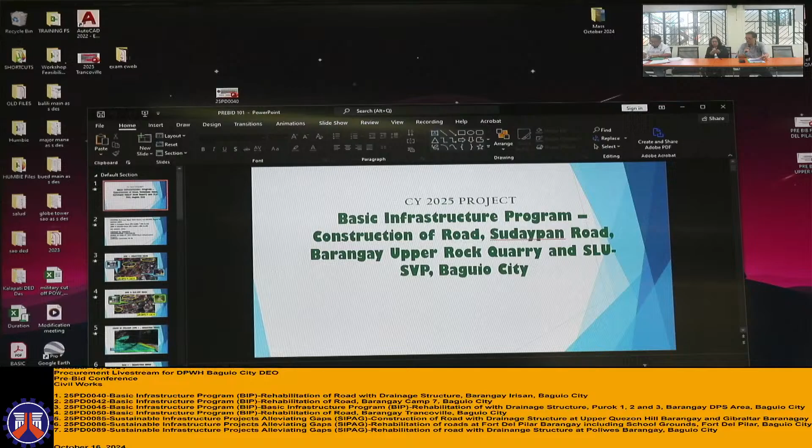And for the first project to present, this is contract ID number 25PD0038. This will be discussed by Engineer Blessing. So you may now start.

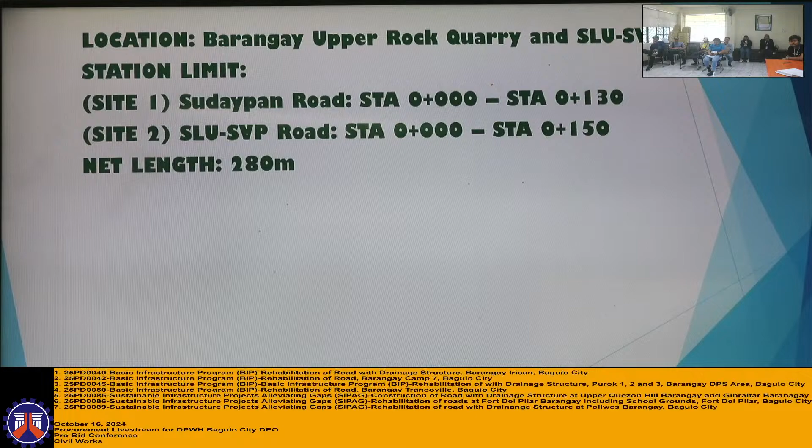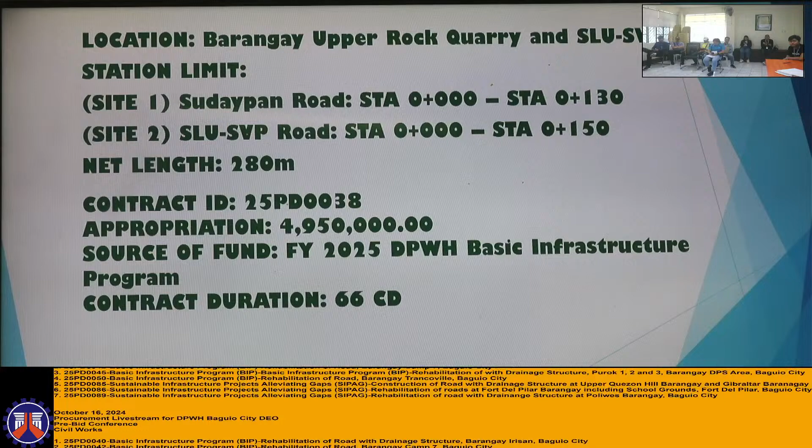The station limit for Site 1 at Sudaypan Road is Station 000 to Station 130, and at Site 2 at SLU-SVP Road, Station 0 to Station 150. The net length of this project is 280 meters with a contract ID of 25PD0038, with an appropriation amount of 4,950,000. The source of fund is FY 2025 DPWH Basic Infrastructure Program, and the contract duration is 66 calendar days.

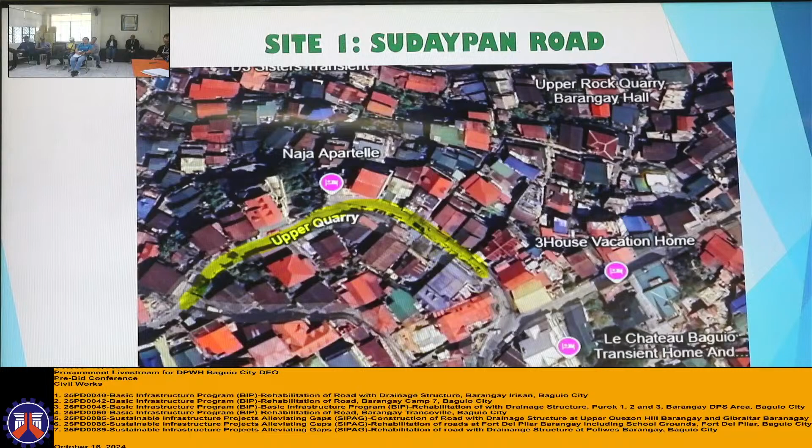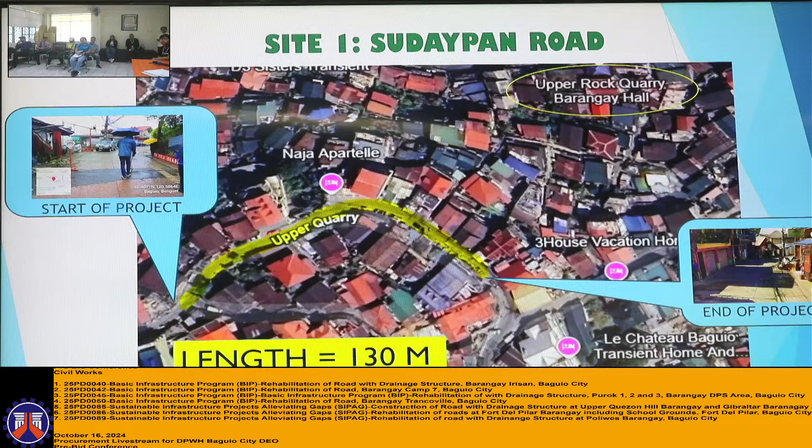So for Site 1 at Sudaypan Road, this is the location, the start of the project, and the end of the project, with a length of 130 meters. For this location, we have a landmark here, the Upper Rock Quarry Barangay Hall and the Naja Apartelle.

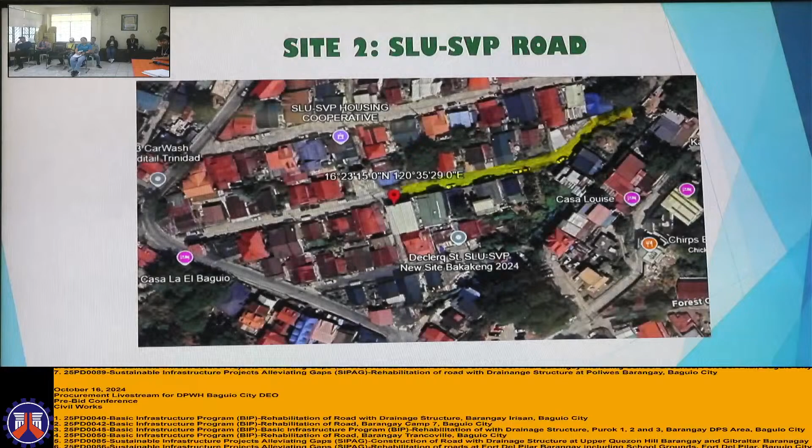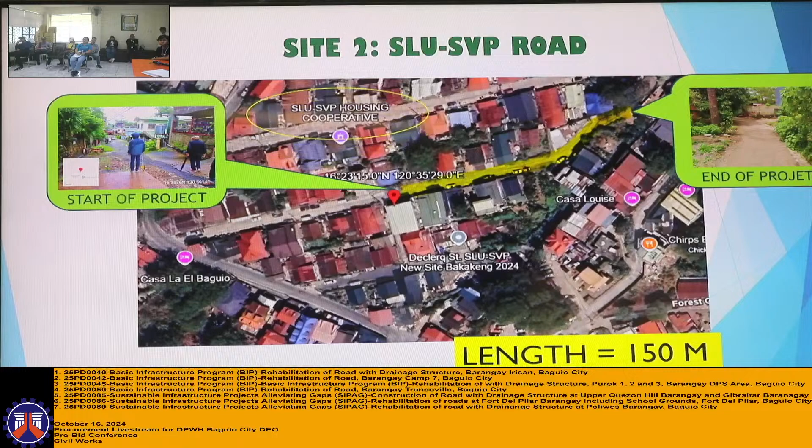And for Site 2 at SLU-SVP Road, we have here the location, the start of the project, and the end of the project, with a length of 150 meters. For this location, we have a landmark here, the SLU-SVP Housing Cooperative and the Casa La El Baguio.

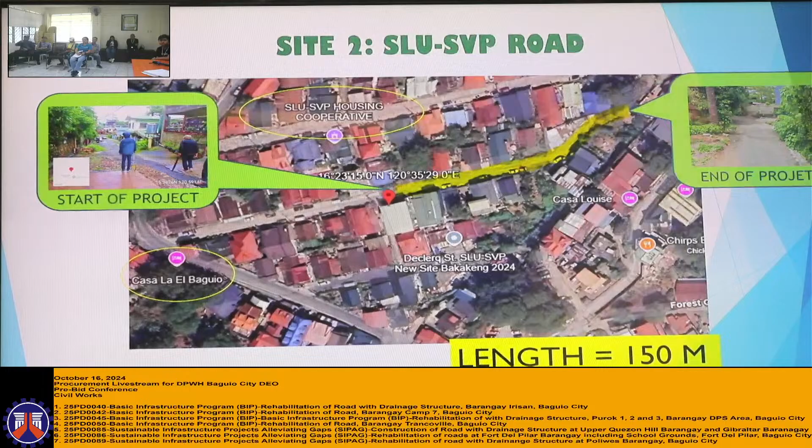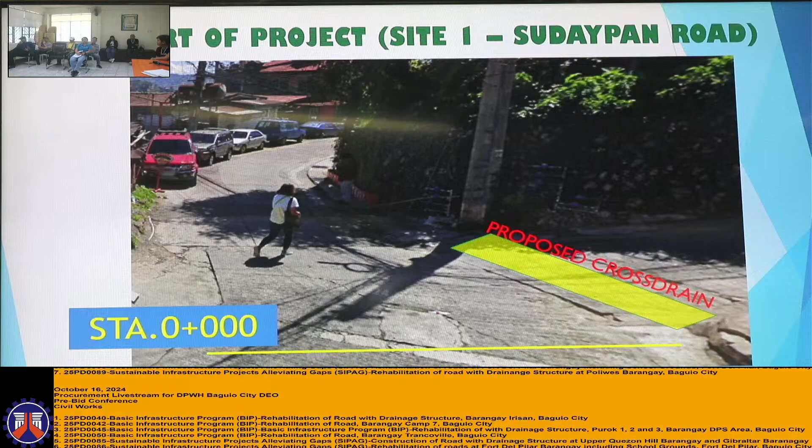So for Site 1 at Sudaypan Road, this is the start of the project at Station 000. We have here at the right side the proposed cross drain and a 2-lane PCCP and a curb and gutter at the left side of the road. For your information, there is an existing box culvert along the pavement at the right side of the road, so this is where our proposed cross drain will tap in.

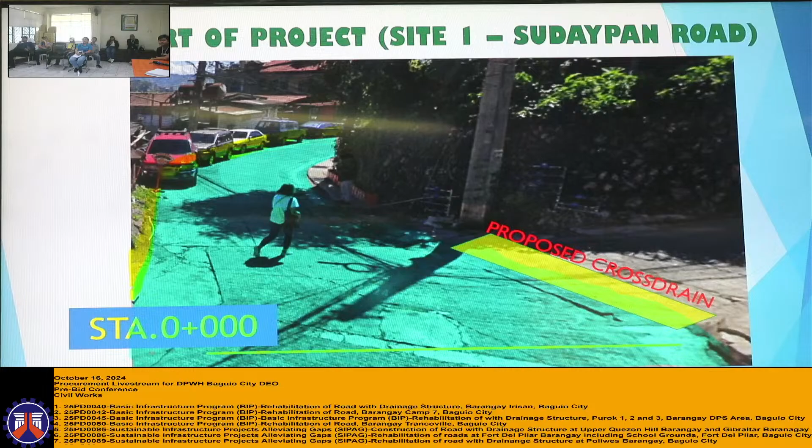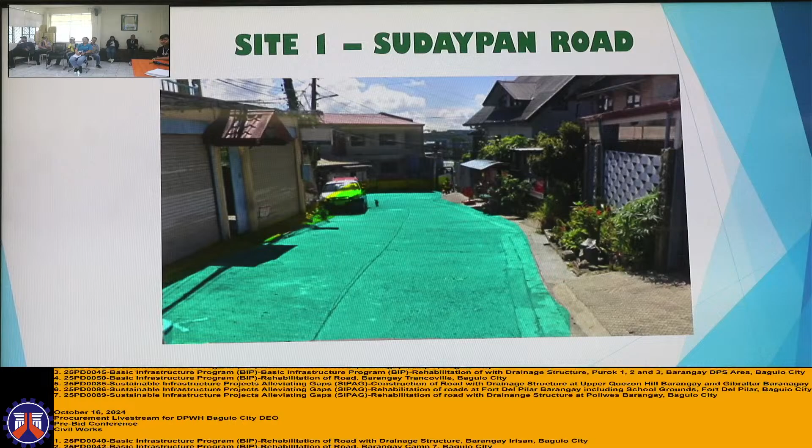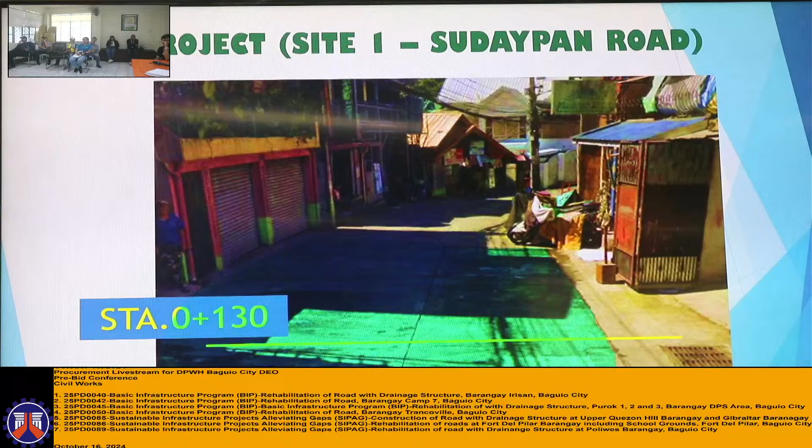These are the pictures at Sudaypan Road, showing the 2-lane PCCP and curb and gutter at the right side. And this is the end of the project at Station 130.

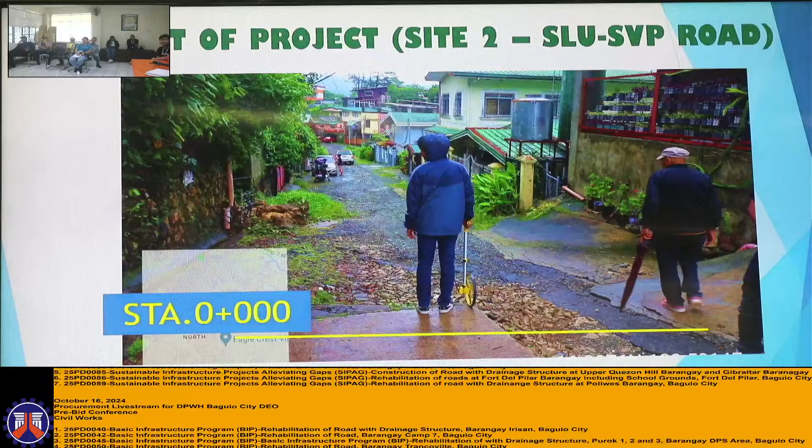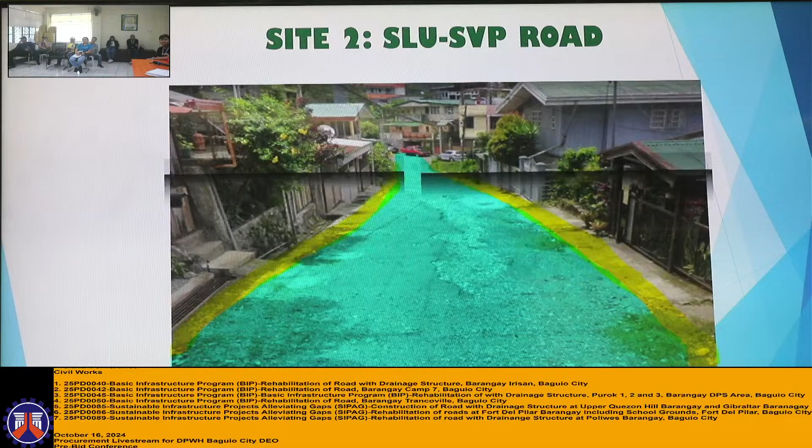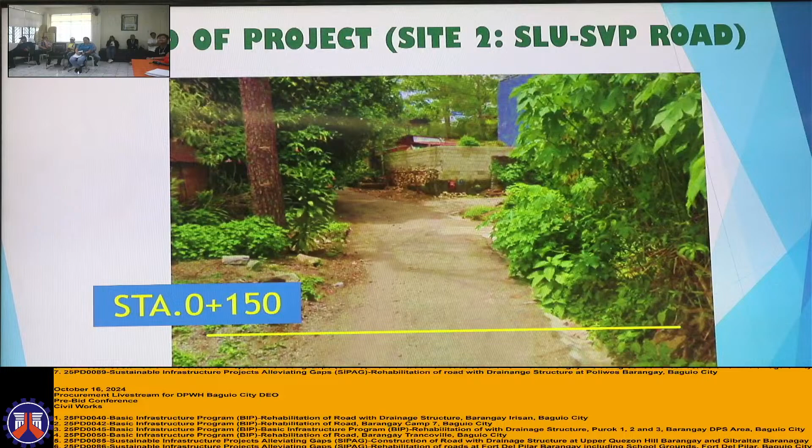And for Site 2 at SLU-SVP Road, this is the start of the project, Station 0. The proposed project for this site is a 2-lane PCCP and a curb and gutter at both sides. And this is the end of the project at Station 150, 2-lane and curb and gutter at both sides.

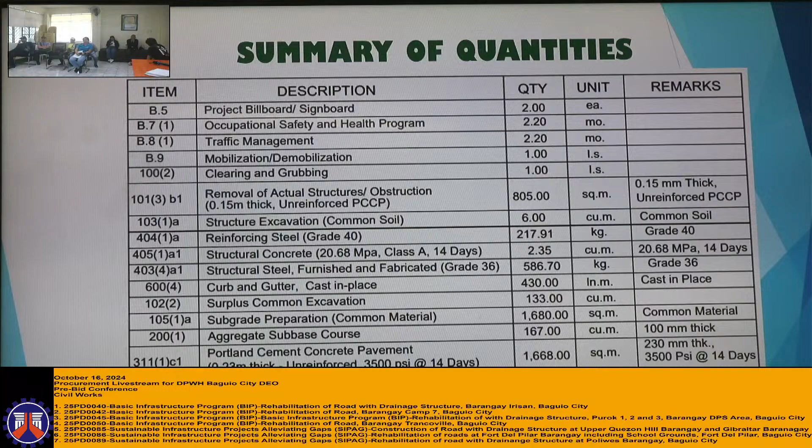And for the summary of quantities, we have project billboard or signboard, occupational safety and health program, traffic management, mobilization and demobilization, clearing and grubbing, removal of actual structures and obstruction for the first site at Sudapyan Road, and structure excavation, reinforcing steel grade 40, structural concrete 20.68 megapascal 14 days, structural steel furnished and fabricated grade 36, curb and gutter cast in place, surplus common excavation, subgrade preparation, aggregate subbase course, and Portland cement concrete pavement with thickness of 230 mm, 3,500 psi at 14 days.

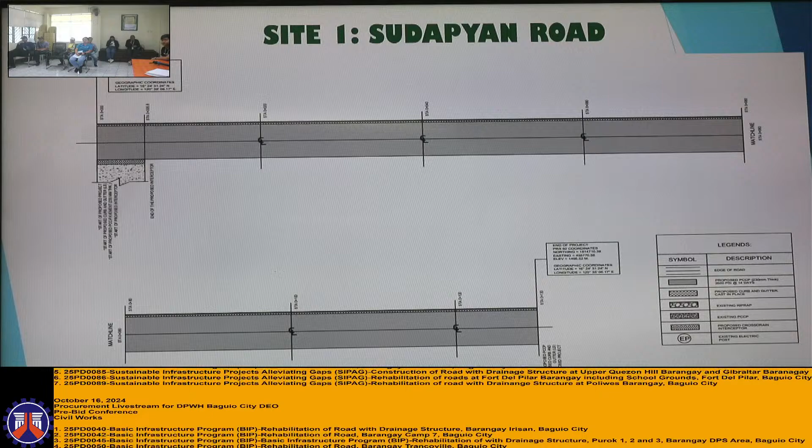So for Site 1, this is the straight line diagram: 130 meters, 2-lane and curb and gutter at the left side. And for this part, we have a cross drain with a length of 5.8 meters at the right side of the road.

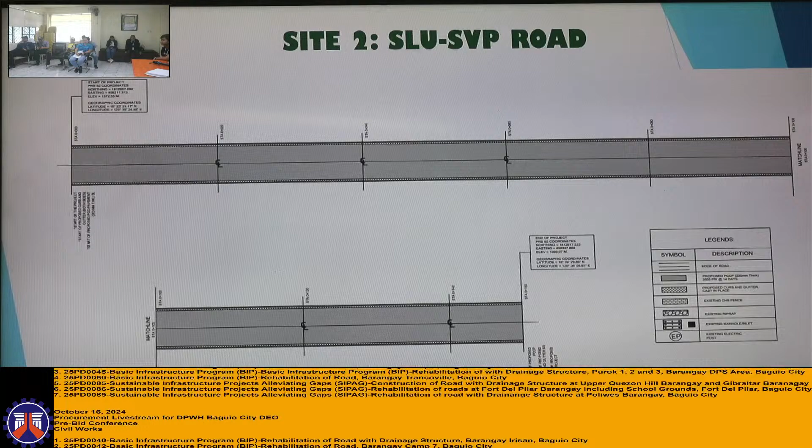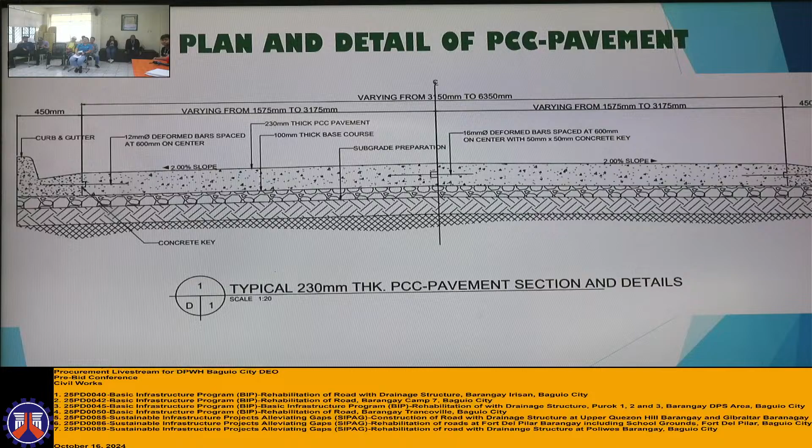And for Site 2, this is the straight line diagram, 150 meters, 2-lane PCCP and curb and gutter at both sides. This is the plan and detail of PCCP, with a thickness of 230 mm. And for the plans and details of curb and gutter, and the longitudinal section and top view details of the cross drain.

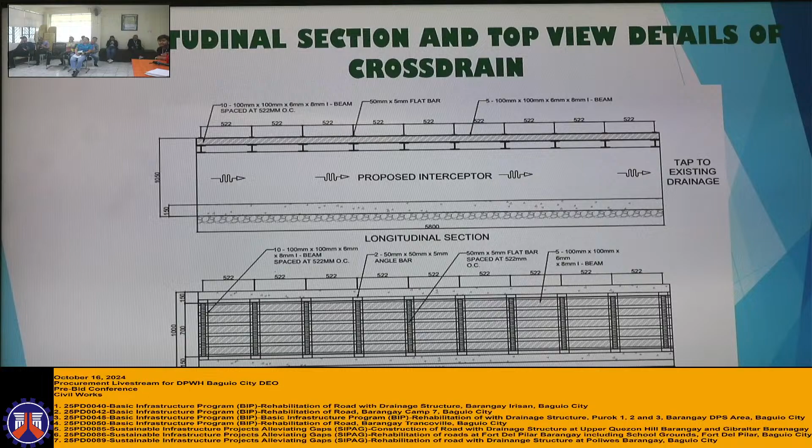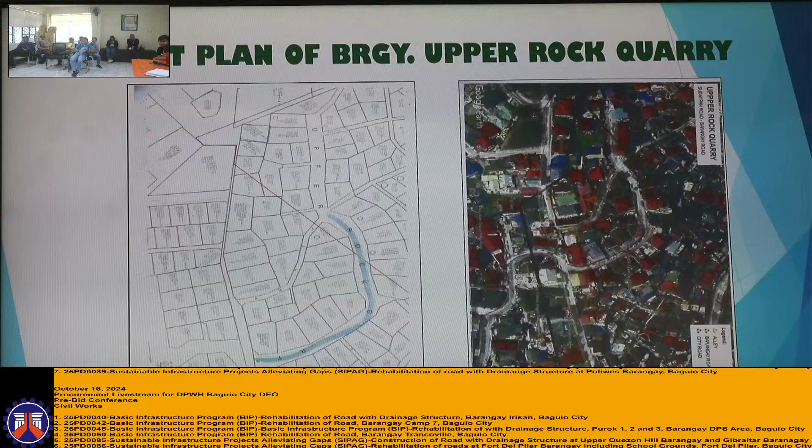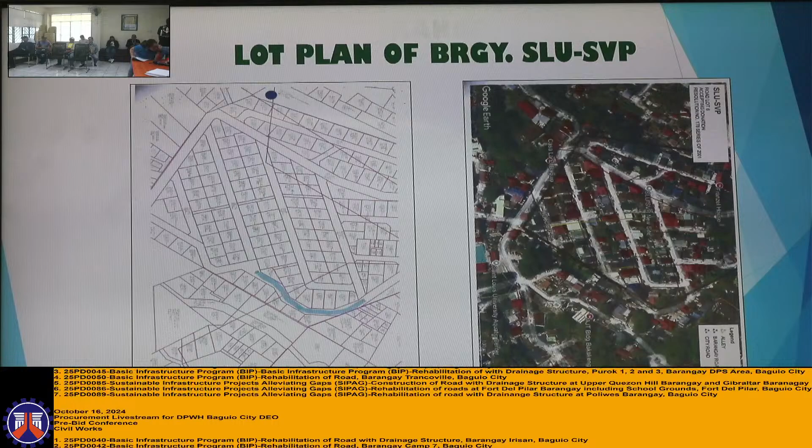This is also the lot plan from the City Engineering Office for the first site, Barangay Upper Rock Quarry, and the lot plan of Barangay SLU-SVP, also from the City Engineering Office. They also said that road Lot 6 located at SLU-SVP Barangay is identified as a barangay road, which was donated to the city through City Resolution number 178, series of 2001. This is the picture of coordination with Barangay Upper Rock Quarry and the picture of the site visit with Barangay SLU-SVP.

So that's all for this project. Thank you. We are open for comments and questions.

Do we have any representative from Barangay SLU and Upper Rock Quarry? Or any of our bidders there, any comment?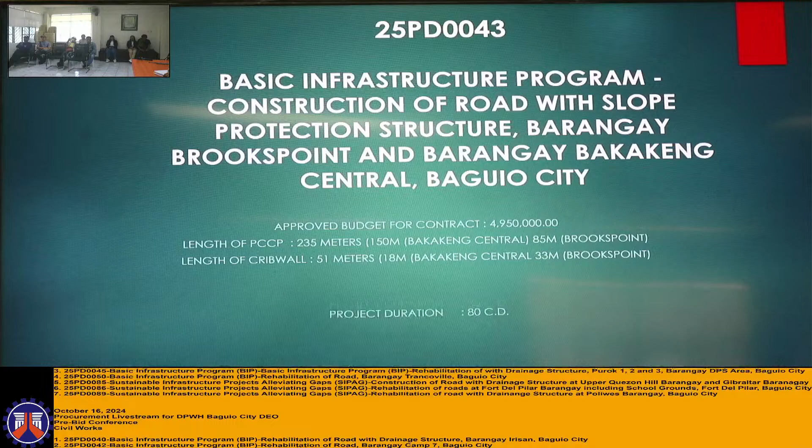We also have a proposed crib wall. For Bakakeng Central, we have 18 meters of crib wall, and in Brookspoint, 33 meters. The project duration is 80 calendar days.

This is the scope of work. We have removal and relocation of utilities, this is in Bakakeng Central, where there's an ongoing issue with an electric post that hasn't been relocated, so we need to accommodate it so there's no obstruction. We also have project billboard and signboard, occupational safety and health, mobilization and demobilization.

For the earthworks in Brookspoint, we have clearing and grubbing, then removal of structures and obstructions since the road has an opening there. For removal of structures and obstruction, the existing PCCP in both locations, we also have subgrade preparation, aggregate base course, and Portland cement concrete pavement.

Both locations have this. Let me clarify the Portland cement concrete pavement: the thickness is 0.23 meters, that's 9 inches. We also have reinforcing steel and structural concrete.

That is for our crib wall and drainage. The inlet and pedestrian railing are located in Brookspoint. And the earthworks for slope protection includes structure excavation, embankment, and grouted riprap, both locations, but the embankment is only in Brookspoint. This is the site location for Brookspoint.

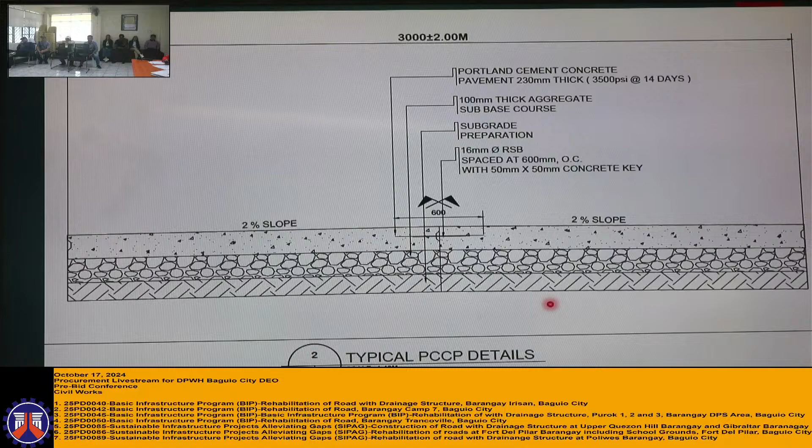We were informed about the situation sa Bingaw. For the record, I just submitted this morning the deed of donation of the portion of the road lot affected by the project. I hope they could consider the deed of donation we submitted. It was a joint effort with the community and the barangay, Mr. Chair.

Sir, the title, is this just the cover? Yes po, because this road lot, this is just a portion. Yes, there are title properties there, but they said they're willing, whatever is really covered by the road, that's not actually covered by the titles. And whoever is covered by the title there, they're willing to donate that portion.